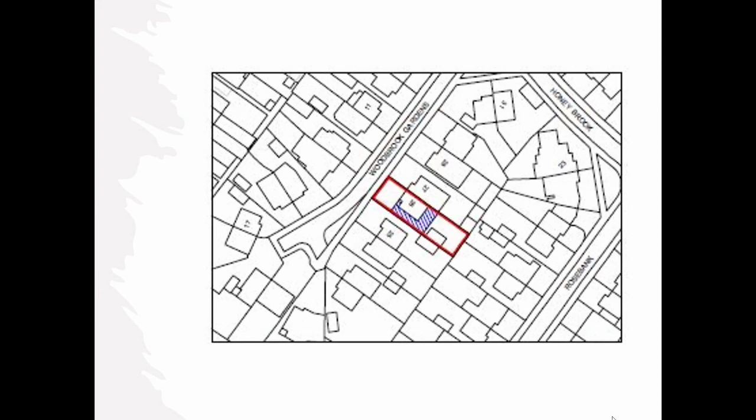There you will see in the blue shaded area the location of the extension. These are the existing rear elevations, the existing side elevation, and this is the front elevation with the gap shown here between this house and an adjoining property over here.

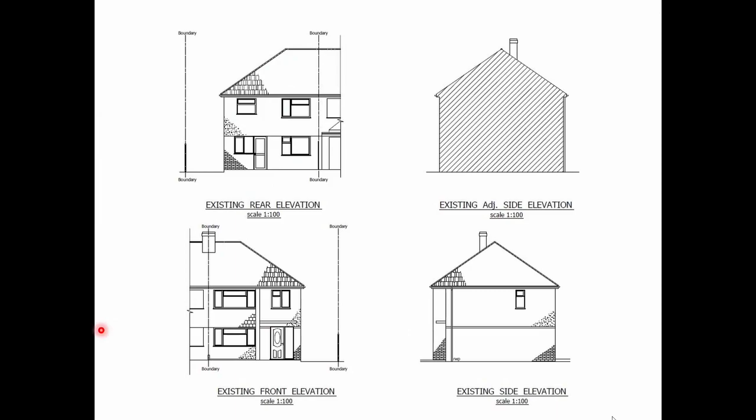So this is the ground floor proposal. As you'll see here, this is the porch that is going to be filled in, and basically the wraparound extension seeks to straighten the kink that the house has over here. So this is the existing dwelling, and this is the side extension.

It's a fairly long side extension, but I'll explain in a moment the permitted development rights that are also available for building extensions at this property. And then a rear extension that's proposed to be 3.5 meters deep from the rear of the existing building.

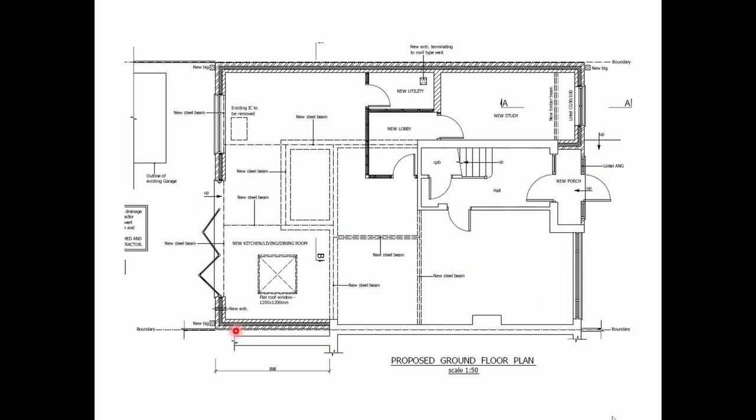So this is the first floor plan, and when I get to the next slide, you'll see the roof plan that perhaps makes this slightly clearer. This doesn't show the ground floor extension proposed in that area, but it does show the fairly modest first floor rear extension that's about 1.5 meters deep at this location.

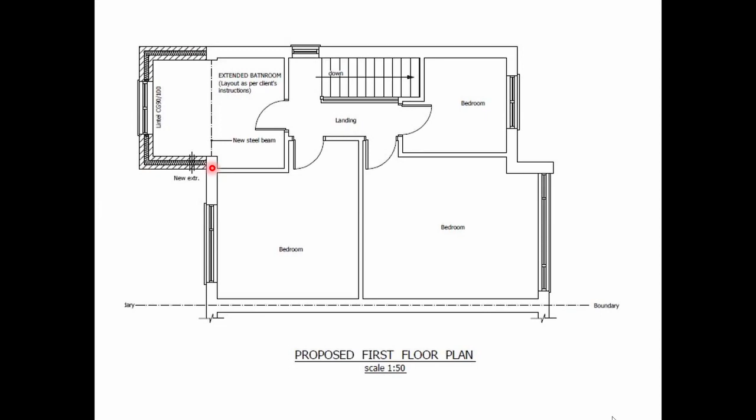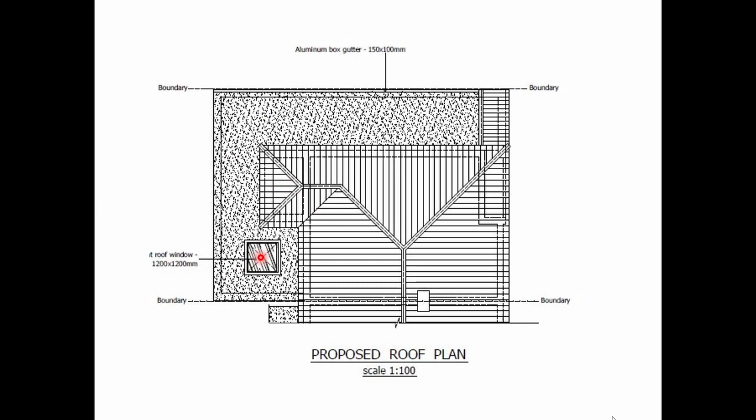This is the roof plan, which shows you the flat roof area over here, which we have put a condition on that it's not to be used for anything other than maintenance purposes. This area here is where the first floor rear extension is proposed, with one roof light in the rear extension as well. So this shows the front elevation.

This is the rear elevation.

Perhaps just a word about permitted development rights. If you do have permitted development rights to build side extensions, as long as they are no wider than half the width of the original house, this would fall within that category. It is also below 3 meters, so in our opinion, to a large extent, the side extension would be permitted development if constructed in a slightly different way.

The rear extension is 3.5 meters deep, and you can build up to 3 meters under permitted development rights, so it's slightly in excess of that. The first floor rear extension is not permitted development, although if you keep away from the side boundaries more than 2 meters, you can actually go up to 4 meters. So it's slightly above permitted development, but I just wanted to make the point that there is a fallback position here.

The materials proposed are render and brick to match the existing building, and the roof materials are tiles as well.

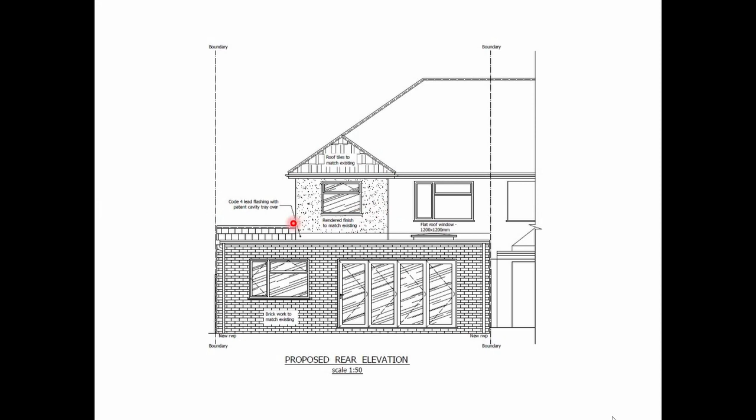This shows the proposed side elevation. It does look like quite a long side and rear extension, but as I said, it's what we call a wraparound, so it actually includes the rear and side elements. This is the view from the other side, with the first floor extension's roof over there.

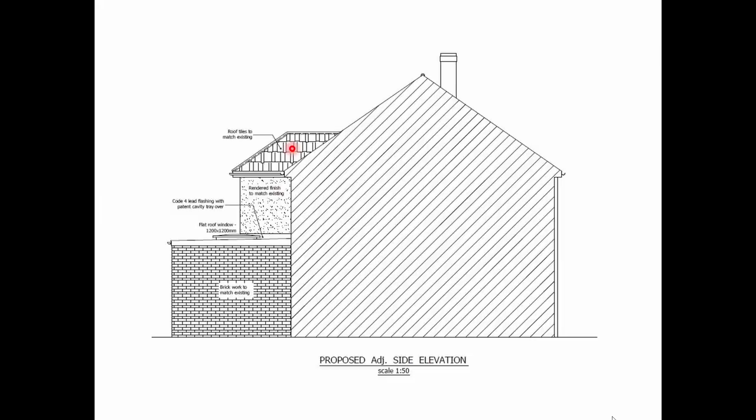So if members will just allow me to take you through the report.

We did have a number of objections, as you can see on page 14 of the report. We had an objection from 25 Woodbrook Gardens, which, later in the report, we discuss - some of the matters being objected against, like covenants and party wall matters, are not matters for planning.

There is something perhaps we can mention in terms of hours of construction, which is something we nowadays put as a standard condition in planning permission. Members might want to consider this, and we usually condition it in line with standard environmental health conditions: 8 to 6 on weekdays, 8 to 1 on Saturdays, and not at all on Sundays and bank holidays, but that's up to members to decide.

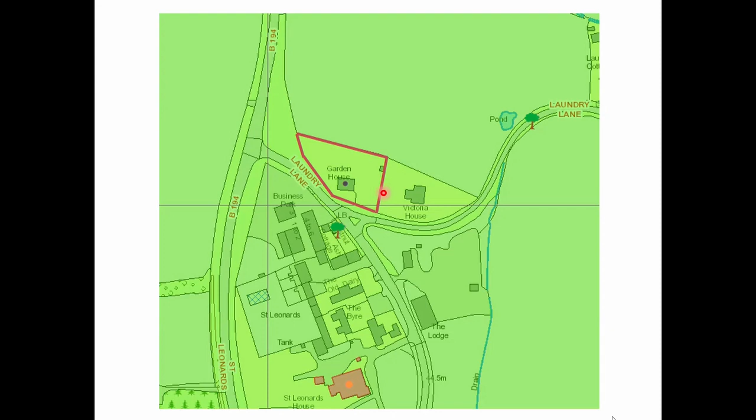The current application is for a coach house to be erected in this area, and I apologise, when I checked the officer's presentation earlier, the drawings aren't great, so I've got another one ready if you want to look at the plans in more detail. Let's see how they render over here.

This property has also got permitted development rights for outbuildings and extensions. This building, however, is not permitted development because it's closer to the boundary than 2 metres, it's over 2.5 metres in height, and it's forward from this elevation. So it does in fact need planning permission, although if built somewhere else further from a boundary, there might well be some permitted development rights available.

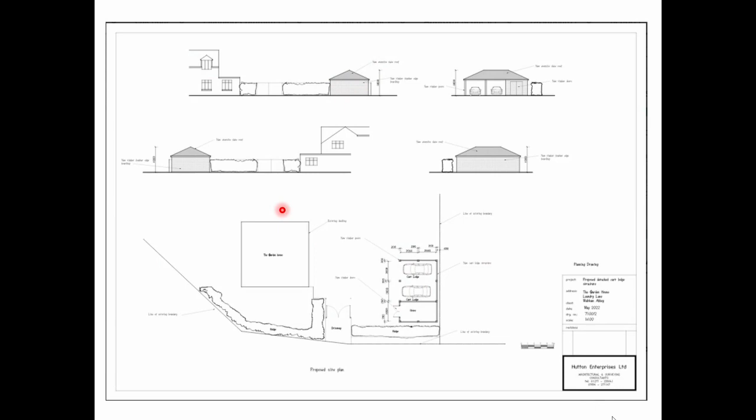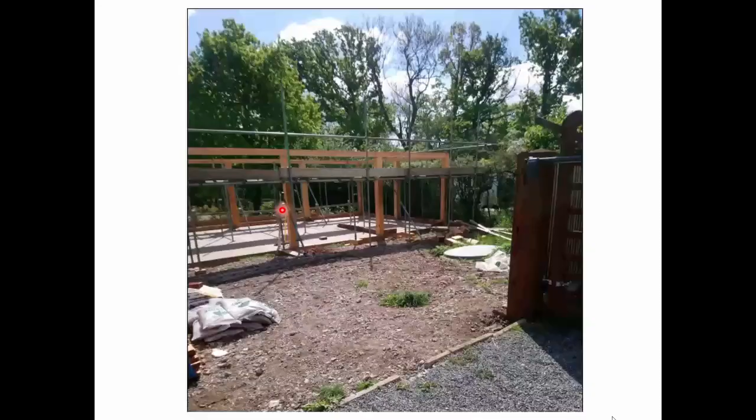So just while I show that to you, perhaps I'll walk you through the report. As I say, there's already permitted development rights on the site. This application actually creates the opportunity for us to remove some of that permitted development rights from the main house, which the applicant has already agreed to in exchange for this building here.

Clearly the development has already commenced, which is why members will note the conditions do not include the usual requirement to commence within 3 years. What it does include, though, is condition 3, which removes classes A, B and E — basically extensions to the roof, extensions to the building itself, and all further outbuildings — which will allow us to control that.

So in terms of openness to the greenbelt, we do accept that this building is inappropriate development, but the fact that we are able to remove permitted development rights from the rest of the building and also any further Class E outbuildings is considered to be very special circumstances, and we are therefore recommending permission is granted subject to conditions.

We did have some objections, the main objections being the impact on the greenbelt, which I've just spoken about, but also regarding the fact that there is concern that it may be turned into an annex, and as members will see, we have a condition 4 that we propose, which is to ensure that the building is kept only available for parking vehicles and for storage.